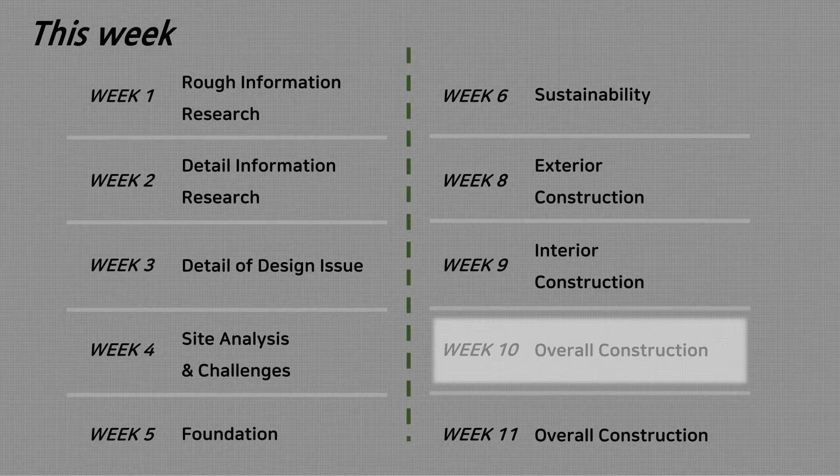This week, we've studied about the internal system of the building. Because the building is for the Olympics, internal systems such as ventilation, cooling, and heating system should make necessary environment for the spectators and the athletes. This week's content is a review of ventilation system, heating and cooling, and water system.

Last week, we studied about the interior construction. We focused on the swimming pool, diving stand, and seats. From now on, we'll start a simple review of last week's content.

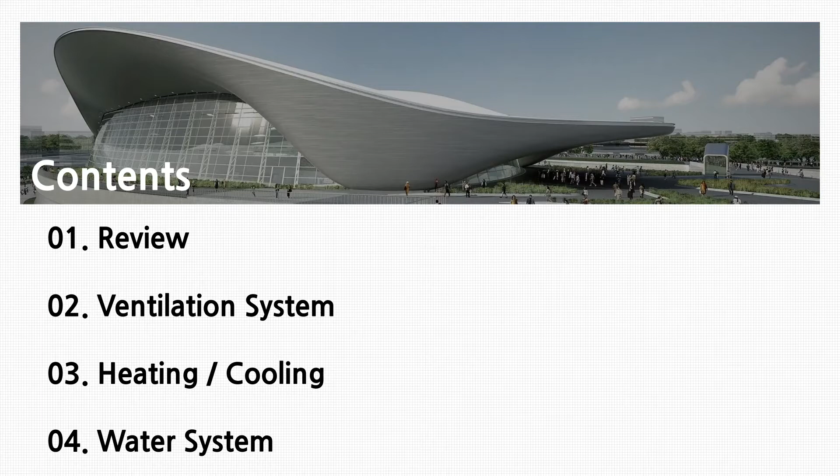To allow us to ensure that the reinforcement could be bent and placed, they developed geometric definition software that extracted the three-dimensional position of all bars at each section and generated the best fit single plane radius bar.

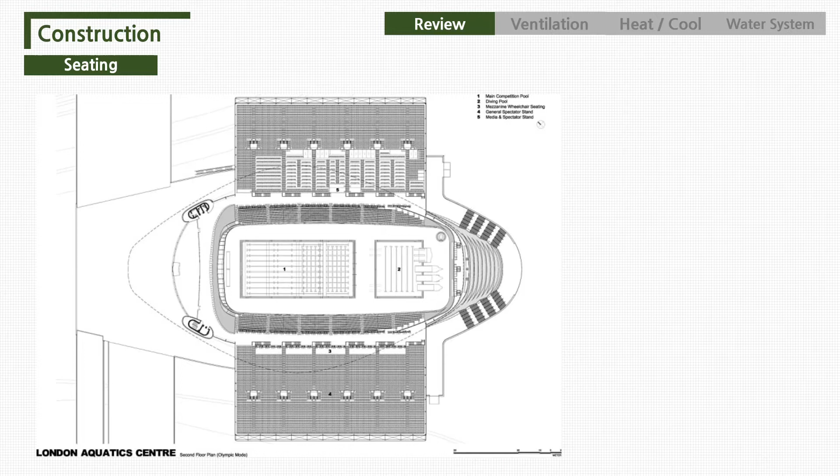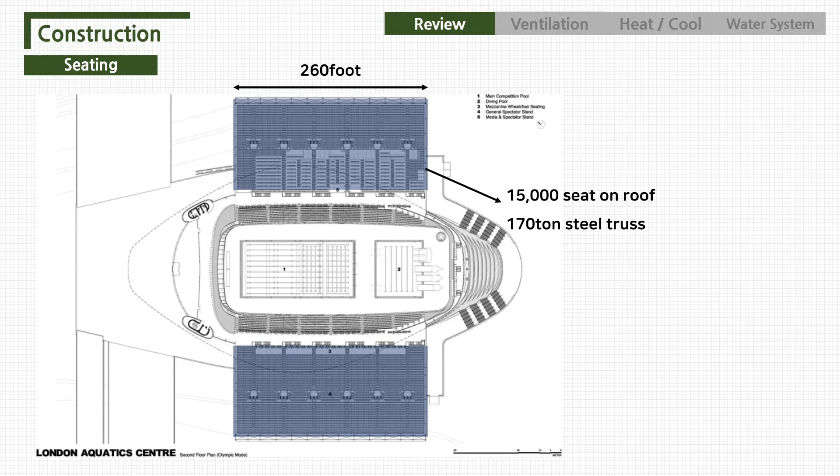London wanted to keep the structure and use it as a community center, which the city was lacking. Zaha Hadid and our architect's solution was to have 15,000 temporary seats that would attach to the roof, needing a 170-ton steel truss, meaning there would be no need for columns or other supports that would block views.

First, let's see the ventilation system. To understand its system, we must know the air movement strategies of the building. London Aquatics Centre employs a variety of ventilation techniques, including both natural and mechanical methods. They try to make the air move in a certain way.

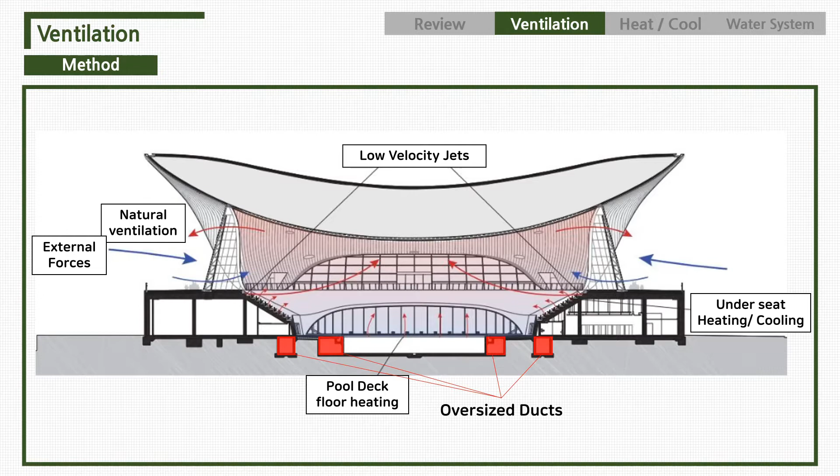Air is supplied to the major event spaces using oversized ducts below the pool deck, providing the freshest air at the level of highest activity. In addition, the ventilation system employs only low-velocity jets and fans, avoiding drafts and helping to establish both a pleasant and consistent ambient environmental experience.

To make the best condition for the athletes, they try to maintain fresh air conditions, especially for the pool side. They call the pool side Comfort Zone 1. This is how it works.

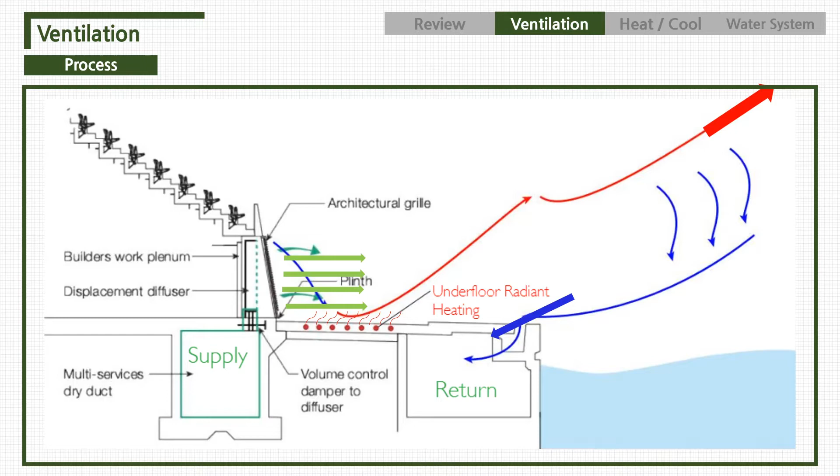First, air is released through vents in the seating wall, and the air is heated by the water-based radiant heating system in the floor. Next, the natural rise that follows allows fresh air to dominate the pool space, while cooler, older air falls and is caught in the return duct. This whole system provides a warm, well-ventilated environment for the athletes.

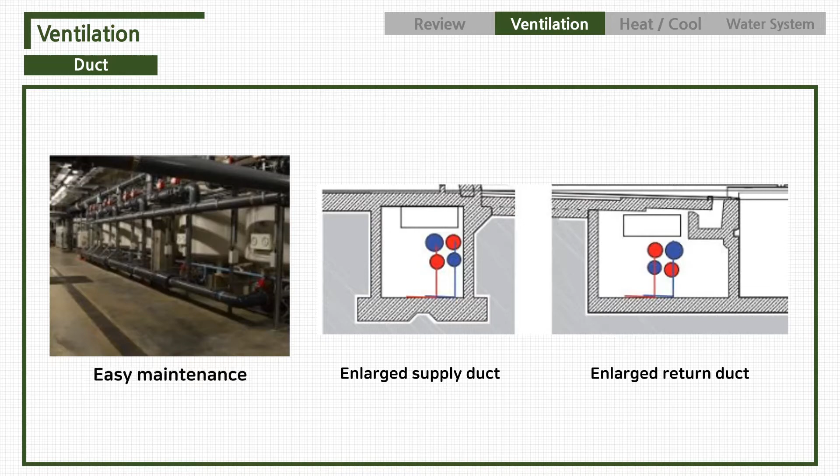The duct I just mentioned supplies both water and air in the pools. By combining a supply and return into one duct, they made a huge duct for the center. This duct was oversized enough for human access, while also allowing for easy maintenance to the central filtration room.

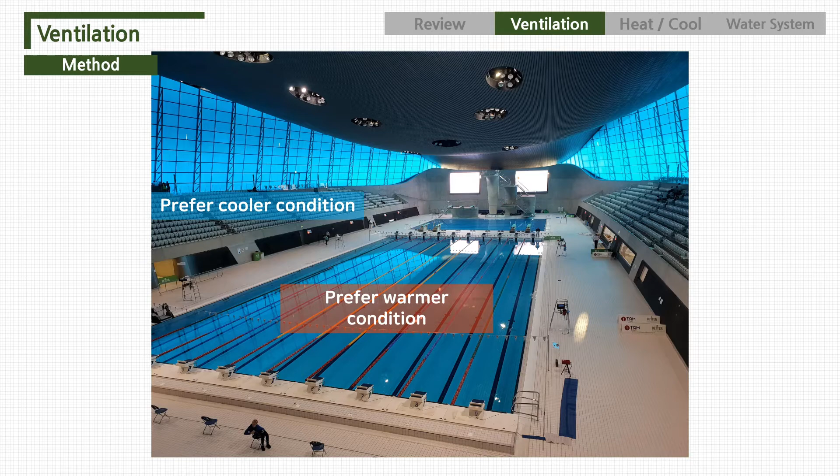Also, there is Comfort Zone 2, spectator seating. As the building was for the sports game, the seating environment for the spectators is important too. Due to the significantly cooler atmosphere desired by spectators as opposed to the athletes, the seating was an entirely different system than the pool side.

Each seat is supplied with its own under-seat vent, which supplies the desired cool air directly to the individual spectator. The air is cooled with a series of ammonia chillers. As the air gradually rises in temperature, it also begins to rise physically and is collected in the larger return vents located at the top of the stands.

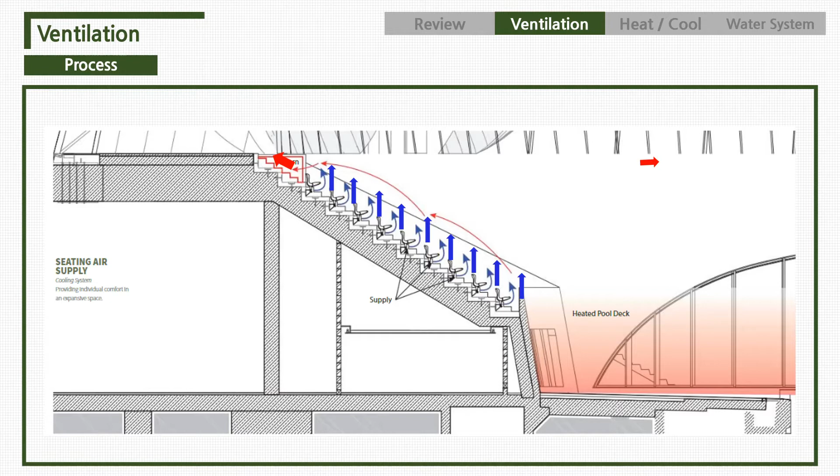Low-velocity jets at the top of the stands also shoot heated air into the expansive cavity above the pools, which helps prevent any unwanted drafts in the comfort zone.

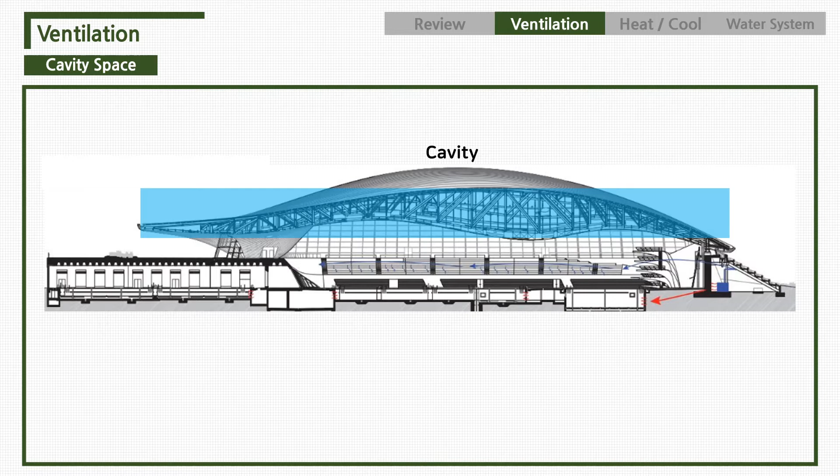Moreover, there was cavity space in the roof. If the cavity is not properly conditioned, condensation and air quality would be serious problems. So the design team also made a ventilation system in the roof.

They specified a series of large fans, which together keep the air in the roof cavity circulating until it can be collected and recycled. This air movement prevents condensation and problems with bad air quality.

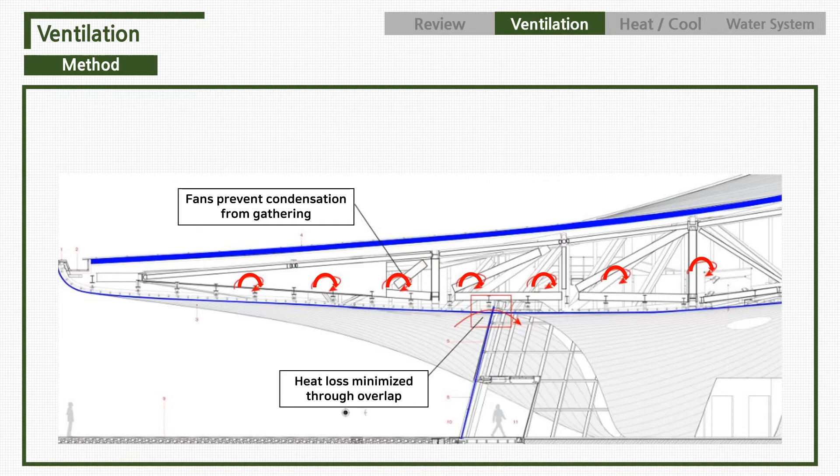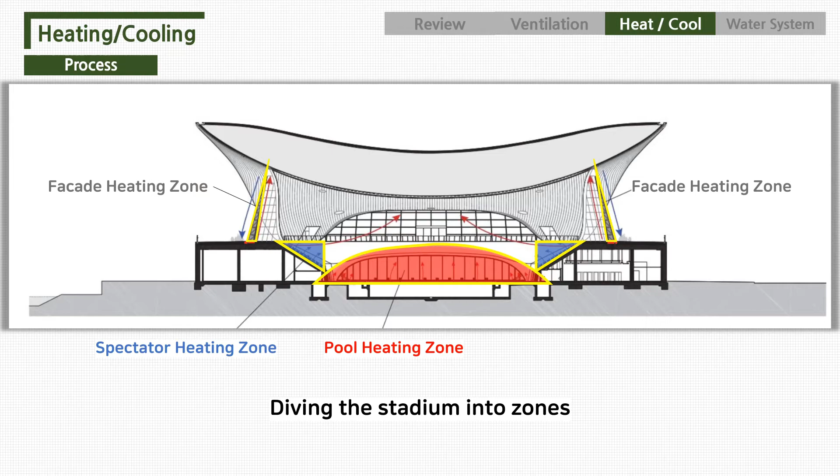The heating and cooling system works closely with the ventilation and air movement strategies, dividing the building into major zones with different climate needs, including the pool deck zone for the athletes and the spectator zone.

By dividing the stadium into zones, environmental needs can be met at the point of need, without influencing other spaces, rather than trying to match the entire building and roof cavity to a constant temperature, which would require immense energy inputs.

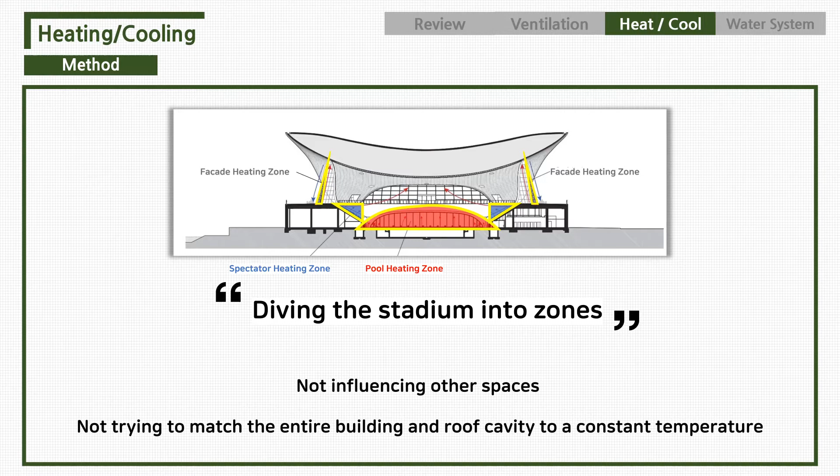The heating and cooling system is again integrated with both water and ventilation systems, utilizing the oversized pool ducts for pipes and movements, while also using the properties and needs of the water system to limit energy waste and increase efficiency.

Detailing the facade, specifically at the curtain wall, was very carefully considered and detailed, both from a structural standpoint and especially from a heating and cooling standpoint.

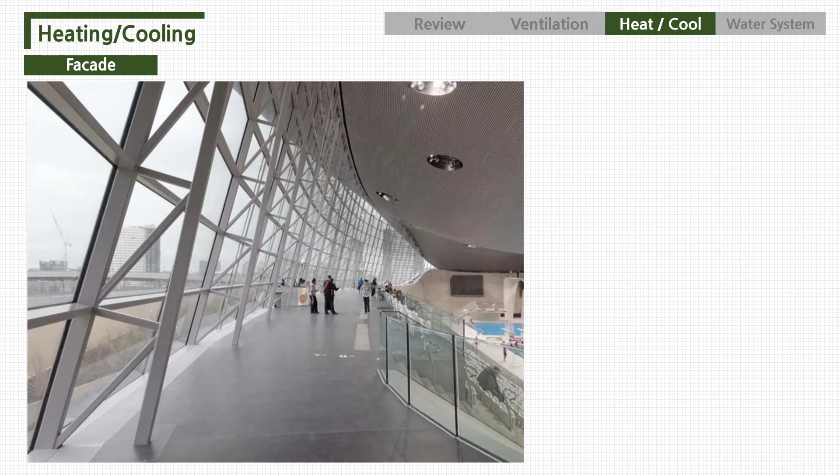The expansive curtain walls had to be self-supporting, so a series of enlarged vertical and horizontal mullions with attached steel tubes was implemented, which also allowed for carefully considered radiant heating tubes to be installed within those same enlarged mullions. These systems together allow heating to occur directly at the point of largest heat loss, the curtain wall itself.

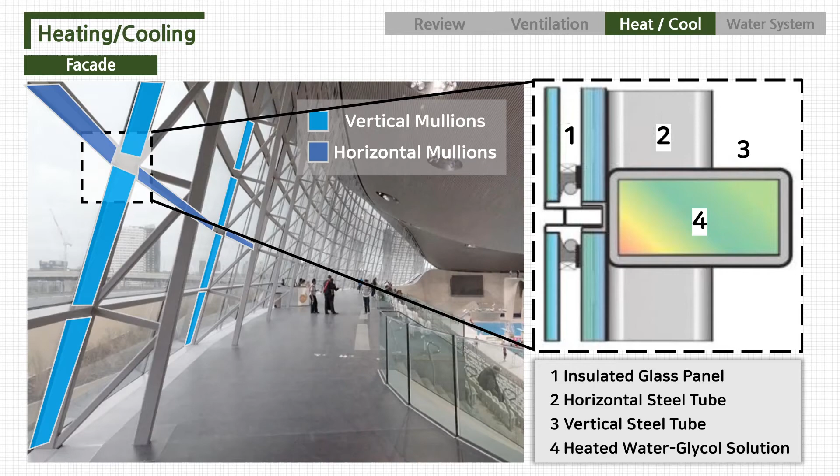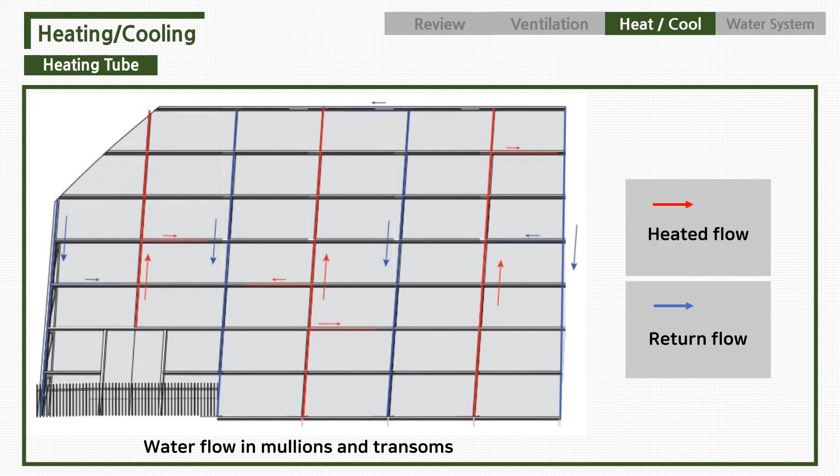The heating tubes, filled with a water-based solution, are supplied from a mechanical filtration room. The system, though accessible for repair, is completely self-contained, using pressure to move the water through the tubes, up and down the mullions, and across a few larger transoms.

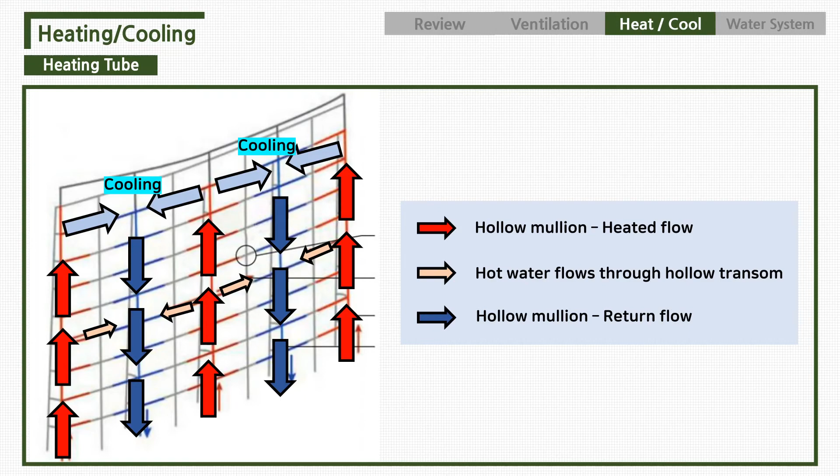The water heats up the air at the base of the curtain wall, which then rises until it reaches the top, where it begins to cool and descend softly back into the interior. This continued movement of air also helps solve an even greater problem than comfort: condensation.

The London Aquatics Centre organizes the water system into largely two main systems: one is the double use of water, and the other is the rainwater system. First, let's look at the double use of water in the London Aquatics Centre.

Normally, the overflow of water from a pool becomes wastewater. But at the London Aquatics Centre, the overflow of water at the pool doesn't turn into wastewater. Instead, it flows to the filtration room next to it.

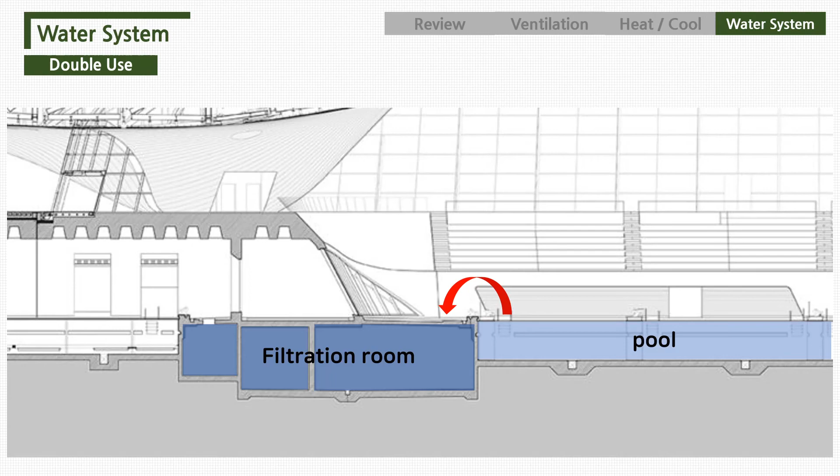The filtration room is located between the Olympic and practice pools and acts as the center of the building's integrated function. It collects the backwash water, which is the used water from the swimming pool or shower rooms, and recovers this used water through chemical treatment, removing particles down to 1 micron.

Finally, the room redistributes the water to the toilets, locker rooms, and public spaces that don't need clean water. This double use of all water is one of the greatest water-saving moves of the building.

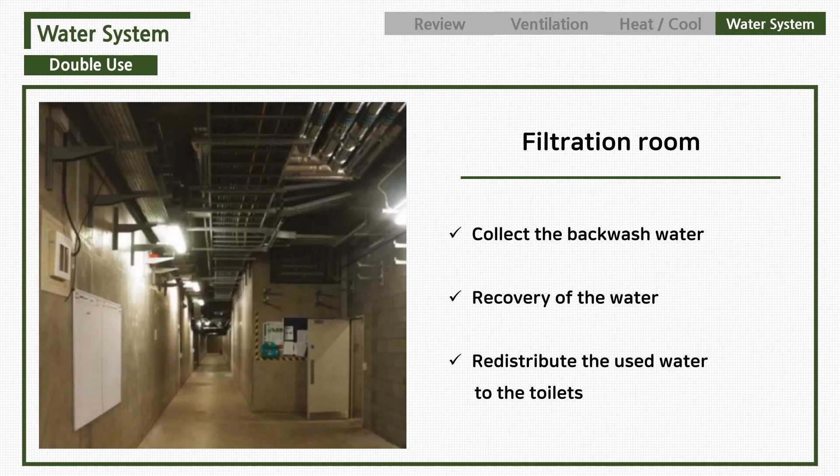As mentioned, the filtration room, located at the center, supplies the used water through enlarged pipes to each space that needs the water.

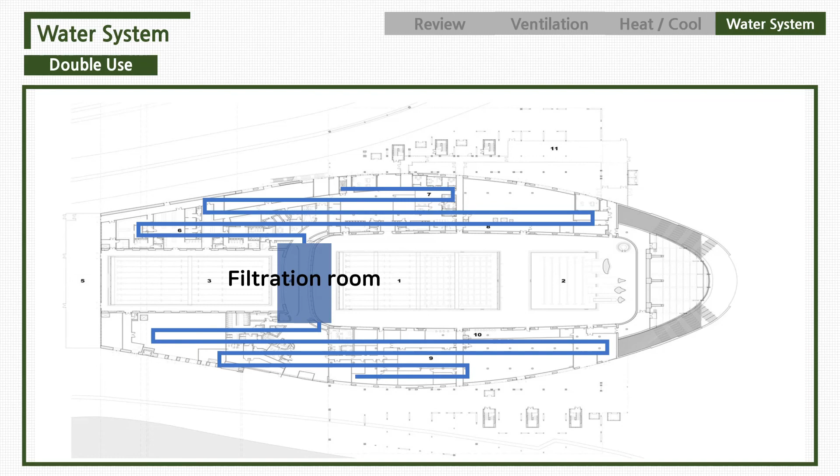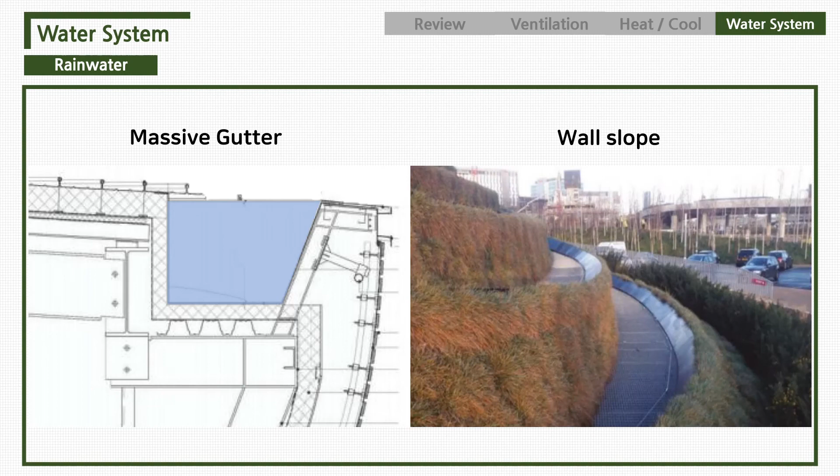The London Aquatics Centre also uses another method for its water system: the rainwater system. Literally, on a rainy day, the massive gutter at the edges of the roof collects rainwater and lets it flow from top to bottom, following the wall slope.

As a result of this effect, the rainwater flows along the roof and gathers in the massive gutter, then falls to the bottom, following the wall slope.

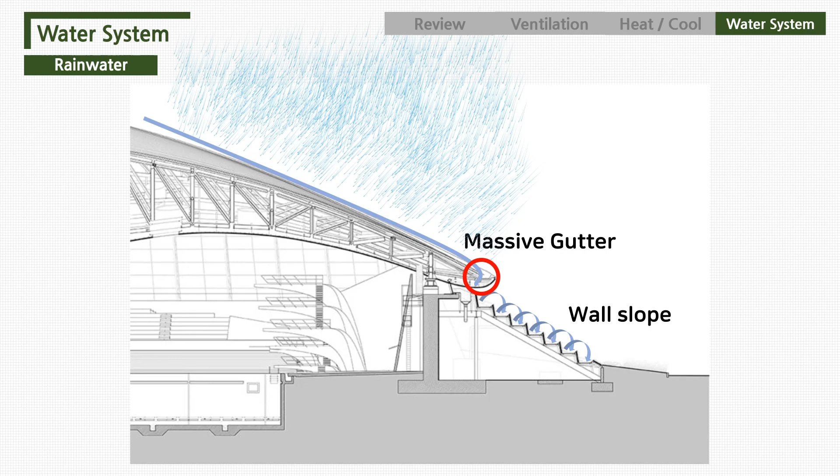The gathered rainwater can also be used in the facilities' toilets and showers, which account for the largest water demand in the facility. Through this double use of water and the rainwater system, the London Aquatics Centre saves up to 32% of water annually.

This is the end of our presentation. This week we talked about interior construction, and next week we'll talk about overall construction.